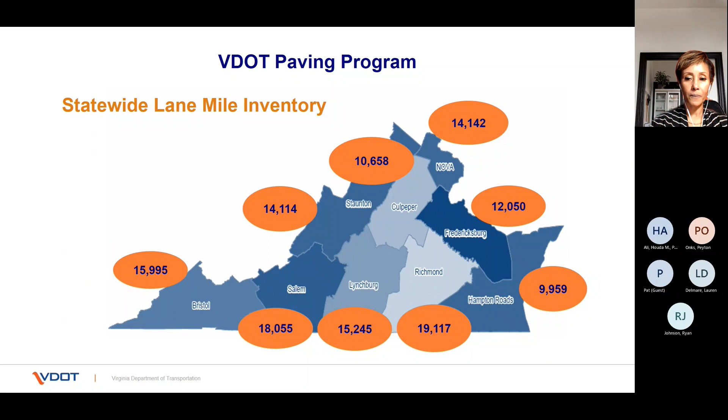The construction aspect of paving is seasonal and takes place during the warmer weather months, from spring to early fall. However, the planning for paving is a year-round process. The process starts in spring going into summer with data collection for the next season.

Over the summer into the fall, we start analyzing the data, determine how much need is there compared to the available funds, and prepare the schedules and coordinate with central office. Then in winter, we close out previous contracts, put out new contracts for bids, award and execute the new contracts by February or March of the next year.

How our roads get selected for paving is a question we get quite often. VDOT identifies which roads are selected for paving by using the Critical Condition Index, CCI rating system, which ranges from 0, representing very poor, to 100 for excellent condition. The process is generally data-driven and based on several factors. As we mentioned, the pavement condition based on CCI ratings is one, traffic volumes is another.

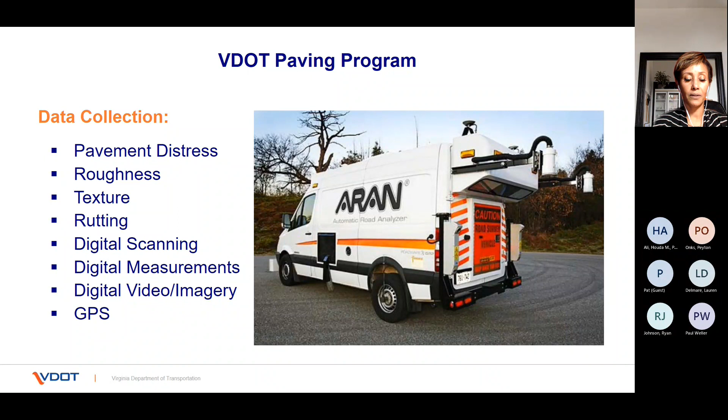Once the data is collected, we determine the frequency for data collection depending on the type of roadway classification. Data is collected annually for interstate, primary, and high volume secondary roads, those with traffic volumes higher than 3,500 vehicles per day. For low volume roads below 3,500 vehicles per day, those with a route number of 600 or higher, making up the majority of the lane miles including residential streets, we cover 20% of those every year, with the goal to cover the full lane mile inventory every 5 years. This lower frequency is because of the higher mileage and limited resources.

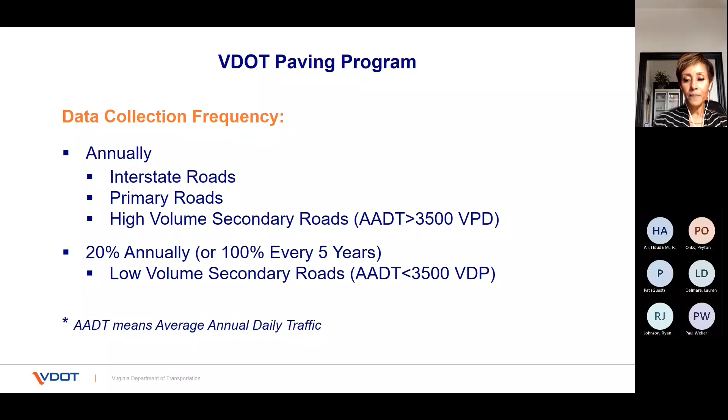On this slide, you can see that after the pavement condition data is collected and analyzed, it gets translated into a rating on a scale from 0 being worst to 100 being best, like in the case of a new road. The rating system we use is called CCI, which stands for Critical Condition Index. We focus on very poor and poor roads with sufficiency ratings below 60 CCI. We do not pave roads with ratings higher than 60 CCI.

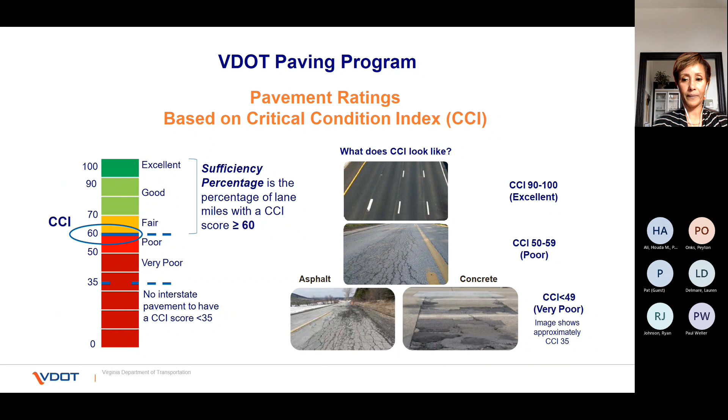Pavement condition targets are decided based on the type of roads. The targets for 2023 are shown in the box at the bottom left of the screen in green. For interstate, high volume primaries, and high volume secondaries, our goal is to have 82% of the network at a 60 CCI rating or above. For low volume primary, we have a target of 75%. For low volume secondary roads, the ones in red, we have a lower target of 60%. We will see later in the presentation how the current pavement condition informs our budget decisions.

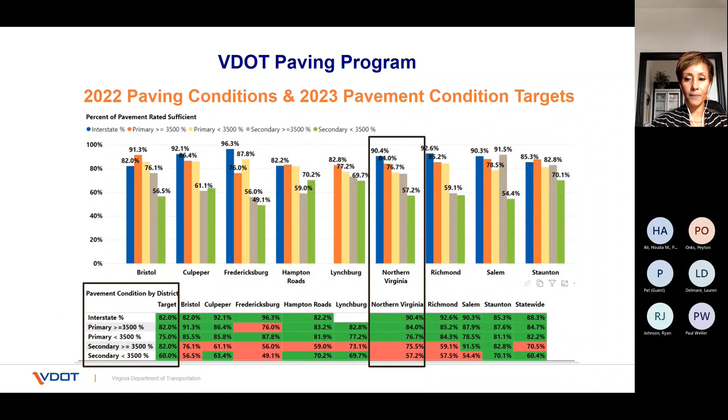We do apply different treatments. There is preventive maintenance, where we try to extend the life of pavement by applying slurry seal. We also do limited patching and crack seal. Candidate roads are typically not in poor condition, with a CCI rating of 60 or above. Under corrective maintenance, we do mill and overlay, 2-inch most commonly, up to 4-inch depending on road condition. This treatment is the most common and targets roads in poor condition. In rare occasions, we may have to replace the pavement to full depth and rebuild the road. Roads targeted with this type of treatment are typically very old and built to older standards.

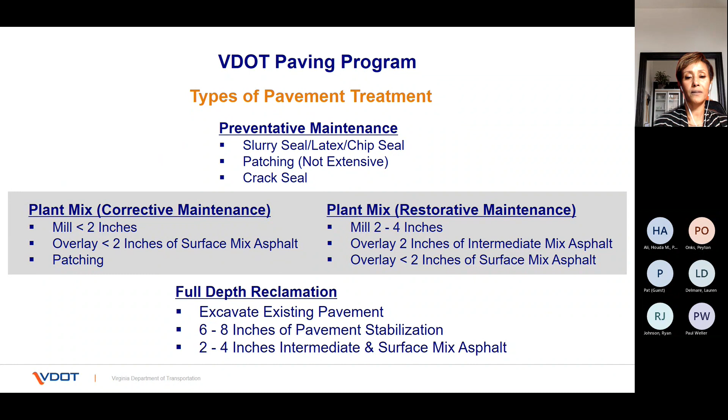Our VDOT infrastructure and maintenance teams have determined that about 43% of our low volume secondary roads have combined Critical Condition Index in the 30s and 40s, indicating very poor condition and are due for repaving. At current funding levels, we pave about 6% of the road network each year. The Nova District continues to work diligently to catch up on paving roads across Northern Virginia. Until the roads are ultimately repaved, our VDOT maintenance team will continue to monitor for emergencies and safety-related issues such as potholes and needed patching.

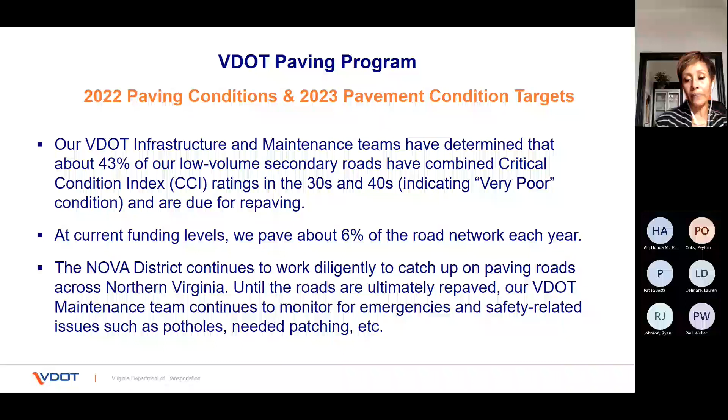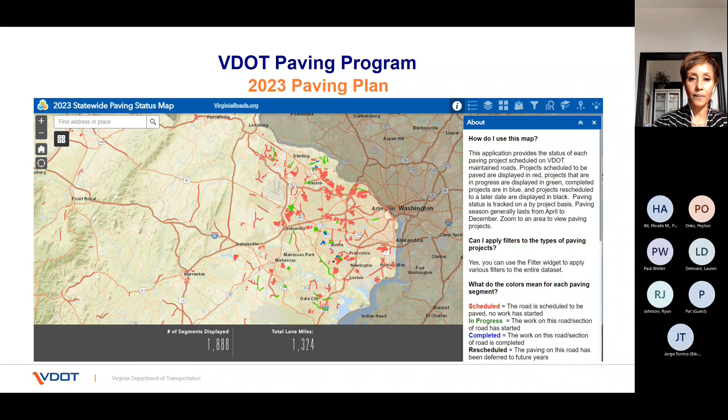VDOT tries to take advantage of repaving to implement road striping in ways that enhance safety and operation. We strive most commonly to replace in-kind, putting back what existed before we mill and repave. We may occasionally restripe to improve traffic conditions by extending a turn lane, for example.

We also take the repaving opportunity to collaborate with the county to implement new marking patterns, for instance to reduce the width of travel lanes to enhance on-road bike routes, and to implement new crosswalks to improve pedestrian safety.

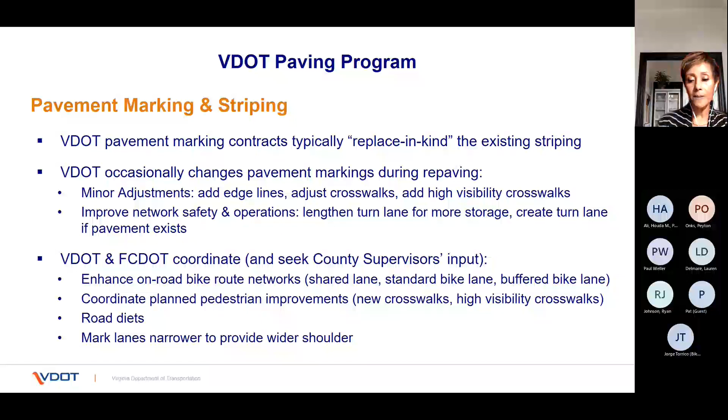Now I'm going to discuss the proposed striping modifications that Fairfax County works with VDOT to implement through the repaving program. We have one modification crosswalk to talk about, but first I'll go over the process and how we come to determine what the proposed modifications are.

This is a collaborative effort between VDOT and Fairfax County. We coordinate on improving traffic safety for all users through the paving program. Fairfax County reviews the draft paving plan when VDOT initially publishes it in the early stages, and we identify opportunities for improvements, including possible new crosswalks, widening shoulders or medians by shifting the lane markings to narrow the lanes or reduce lanes, modifying the locations of bus stops where feasible, and adding bike lanes or turn lanes where appropriate.

VDOT develops the striping and signing plans and works with the contractors to implement them. We lead the public engagement efforts like tonight, with a lot of help from VDOT. VDOT identifies and reconstructs any substandard curb ramps or median roll throughs as required on the federal level to provide accessible routes.

And we install bike lane, road diet, or crosswalk signage that VDOT later maintains, but we do install it.

We look for crosswalk enhancements at busy pedestrian crossing locations that don't have crosswalk markings at present. We try to determine if the crosswalk meets the VDOT warrants for a crosswalk, and if minor parking restrictions are needed to provide adequate sight distance to make the crossing as safe as possible, so that drivers can stop with adequate time and distance.

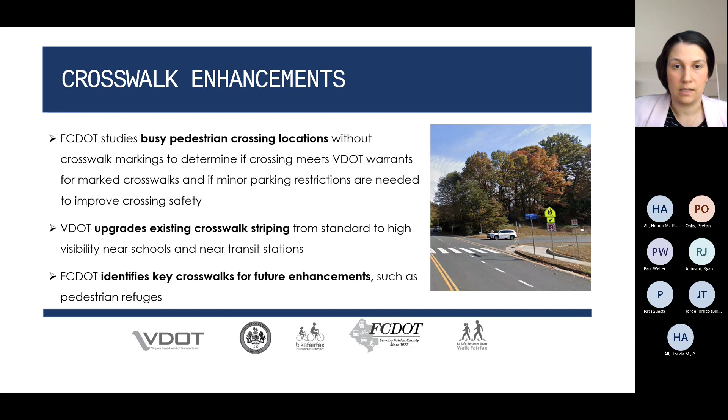VDOT will upgrade existing crosswalk striping anywhere it's not standard markings. They'll typically do that near schools and transit stations, but also at any locations not controlled by a stop sign, yield sign, or signal. They'll go from the two lines to the bars you see on screen in that sample crosswalk picture. We also identify key crosswalks for future enhancements, like pedestrian refuge islands we could come back and add later. We add those to our unfunded crosswalk improvement list for future improvement.

In the Springfield district this year, we have one proposed crosswalk location at Shiplett Boulevard and Capella Avenue. This connects the residents north of Shiplett to the residents south of it, and also along Capella Avenue to the elementary school just to the south of this location.

This would include a proposed parking restriction marked in yellow on the map here, including 8 parking spaces on the westbound side of the street. That's to make sure that a driver approaching from the east going west can see the pedestrian in the crosswalk and have enough time to stop for that pedestrian before the crosswalk.

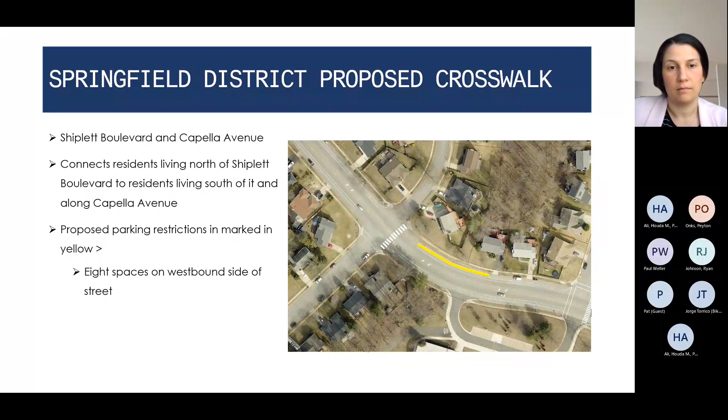There are also existing ramps at this location, which allows us to add the crosswalk without doing any additional work, so it can go in right away and meet our accessibility needs.

So again, tonight we'll be collecting community feedback, any paving related comments. Things like drainage issues, signage, signal needs, walkway repairs, or sight distance issues due to vegetation overgrowth can be directed to VDOT.

There's the My VDOT portal at https://my.vdot.virginia.gov. If you'd like to request any of those repairs, click the 'I Need a Road Repaired' link on that portal, or call 1-800-FOR-ROAD.

That's 1-800-367-7623. If you have striping related comments, related to the crosswalk proposed in the Springfield district, you can submit those electronically to us at Fairfax County by emailing dotbicycleprograms@fairfaxcounty.gov, or by using the feedback form in the red box on the project webpage. We'll be collecting project comments through May 10th, 2023.